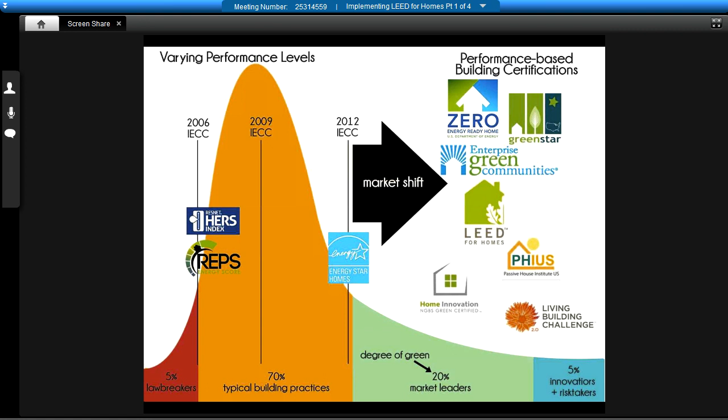Another way to look at this is in terms of typical building practices around the country. A lot of people are currently doing the 2009 IECC. Some states have adopted the 2012 IECC, which is aligning more closely with energy goals. Sorry about this background noise, folks.

Anyway, I like to think of green building as a continuum with different shades of green. It's something to keep in mind as a contextual background for where LEED fits in the scheme of things, and where other programs fit, such as the Challenge Home program, which was recently relabeled the Zero Energy Ready Home, as well as basic common denominators like the HERS index, which is used in many of these programs. HERS is specifically related to energy aspects and used to get points in the energy sections of programs like LEED, National Green Building Standard, Enterprise Green Communities, and the Challenge Home.

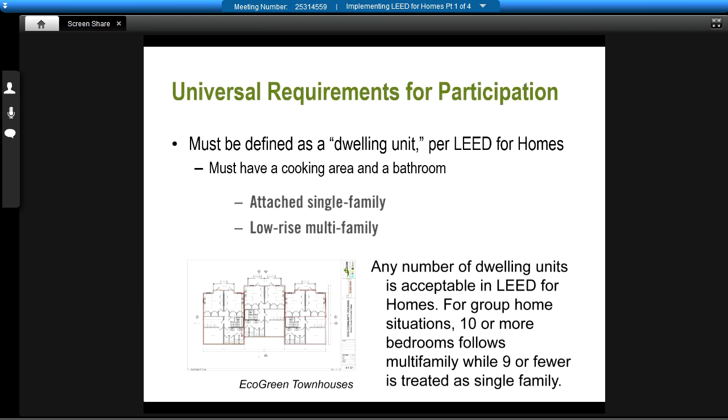I've worked on a couple buildings that are around 270 units, so that's about as big as you can get on some of these larger multifamily projects.

What's worth noting is that there are some universal requirements. Any project, as per LEED for Homes, must be defined as a dwelling unit. A dwelling unit consists of having an independent or private bathroom and a cooking area, like a food prep area. The project must also have a LEED for Homes provider and a green rater involved.

LEED is a building-level certification, so you're not going to get a certain unit in a condo building certified without the other units being certified. It really is at the building level.

In terms of the types of buildings eligible, you'll see everything from multifamily, like we talked about, up to mid-rise and mixed-use types of projects, through the program called Multifamily Mid-Rise, which we'll talk about in a minute.

We could do gut rehabs as well. That foreclosed home I showed as a case study was a gut rehab project that went through LEED, Energy Star, and NGBS, and that was eligible.

Now, had it been a project that was a more basic remodel or maybe just an addition onto a home, that's one of the areas LEED does not get involved with. So if you're thinking of a project of that nature, LEED is not going to be the right program for you to look at.

Ultimately what it comes down to is that the rater has to be able to do, just like with Energy Star, a thermal enclosure checklist inspection, which means verifying the continuity of the insulation throughout the envelope. If the rater can do that, most likely you'll be able to pursue LEED. If they can't verify the continuity of the thermal envelope, then it's probably not going to be able to go through the LEED program.

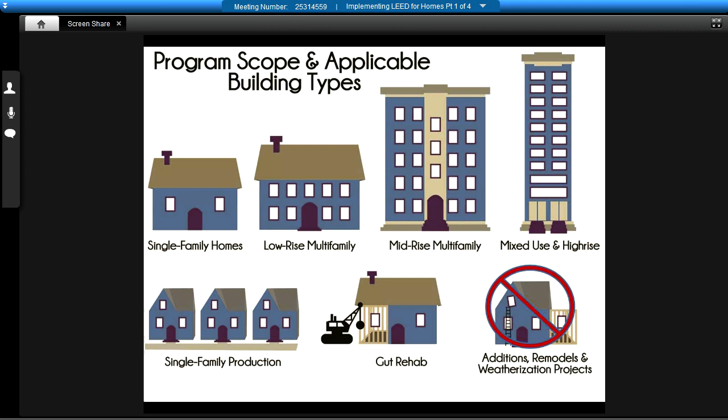But every case is a little different. So if you're in one of those situations, talk with a rater, talk with a LEED for Homes provider, and they can guide you.

Low-rise multifamily - some interesting things to know: low-rise is basically 3 stories or under, with a little bit of flexibility in the story height limit. If you have buildings or units that have their own HVAC and water heating, with no centralized system, then you may be able to go through the low-rise program even if you're a taller building.

For example, yesterday I was in a 4-story, 12-unit building north of Chicago doing final testing and verification. This project was going through LEED for Homes low-rise even though it was a 4-story building, because each unit had its own furnace as well as its own water heater. So it kind of comes down to the mechanical design and setup.

The other thing worth noting is that in these multifamily situations, typically people are doing a HERS rating or energy modeling on a unit-by-unit basis, and then the whole building is scored as the worst performing case. So if you have a lot of units at HERS 62, 63, 67, and then a middle floor interior unit might have a HERS 82 because there's not as much exterior envelope and not as much opportunity to improve the HERS rating against the baseline, the whole building is rated in LEED as if it has a HERS 82 - basically going with the least common denominator.

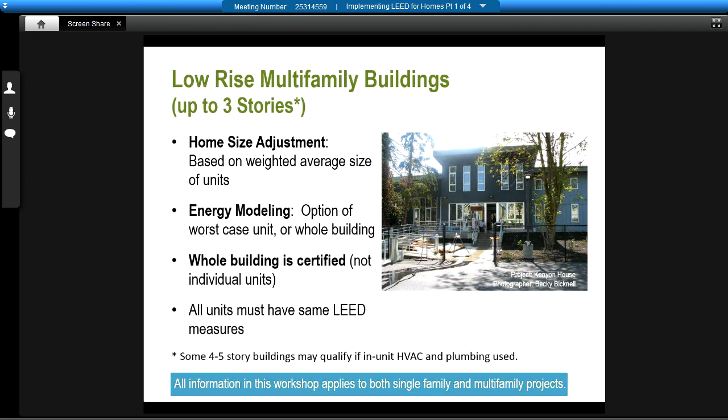As we go throughout the program, this workshop, everything we're going to be talking about is applicable to both multifamily and single family. Although certain cases may show just a single family house, all the credits are the same for low rise and single family. Actually, about 80% of the credits are the same between a single family low rise and the multifamily mid rise rating system. So much of what you're learning today is going to be applicable if you're working in any kind of residential project that's pursuing LEED.

Okay, we talked a lot. I've mentioned HERS a lot, and it's probably a good time to pause for a moment and talk about what a HERS rating is. It may be a new term for some of you. Basically, it's a national standard developed by an organization called RESNET that includes an energy design review, a thermal bypass inspection, in other words, looking at the thermal boundary or the envelope of the building and verifying that.

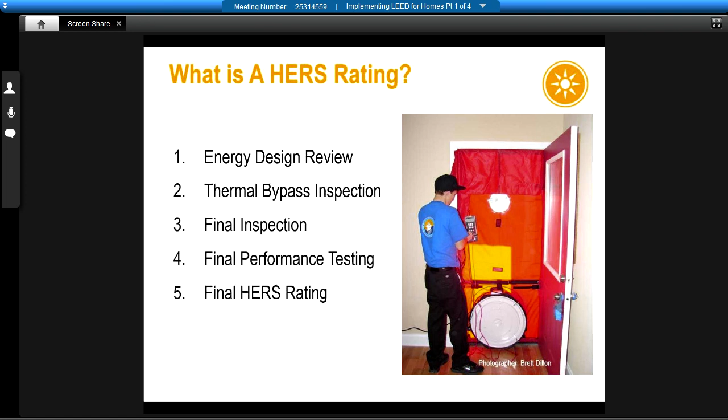Then doing a final inspection to see if everything is built as planned. At that point, doing some final performance testing, as you can see in the photo here. This HERS rater is doing a blower door test to measure the home's performance. And that all comes together into a final HERS rating.

The HERS rating is basically a number that encompasses all of the energy aspects and attributes of the building. Everything from heating and cooling, to water heating, to lighting, to appliances, to the envelope, all included in here. And what you see is that you end up getting a score of a certain amount.

The average LEED certified home is around 65. Most of the homes that I'm working with are actually probably a little bit lower than that. So it really depends on your market and the builders, and their level of performance.

But basically what this means is that if you were building to code, you would have a HERS rating of 100, a typical new construction. And if you were building zero energy, the goal that a lot of people are trying to get to, in theory, you would have a HERS score of 0.

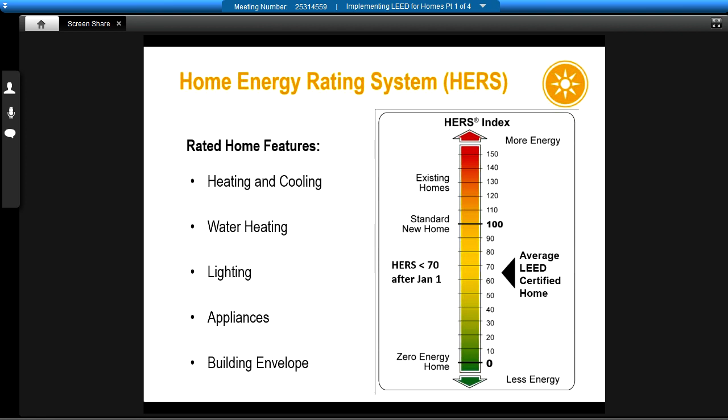So at the end of the day, it's a predictor of performance based on typical consumption, and it's basically an asset rating on the building in terms of what its energy score is going to be. And kind of like golf, the lower the better.

Everything from code. In fact, the 2015 version of the code is actually introducing an alternative pathway for HERS score to meet code. So I know in Climate 5, if you're at a HERS 54 or lower projected, you will be able to get your building permit by meeting the energy code through that way.

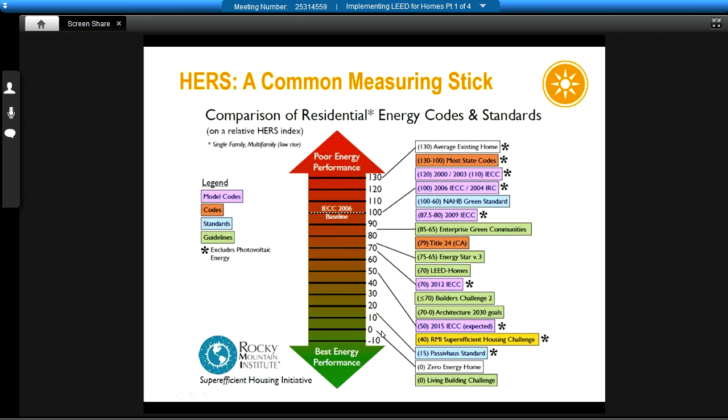And you can see all the way down to things like passive house, very aggressive types of construction, all the way down to the zero energy type homes. So anyway, it's a nice way to roadmap a lot of the programs based on their HERS rating. So just something to keep in mind, and something that we're seeing a little bit more common.

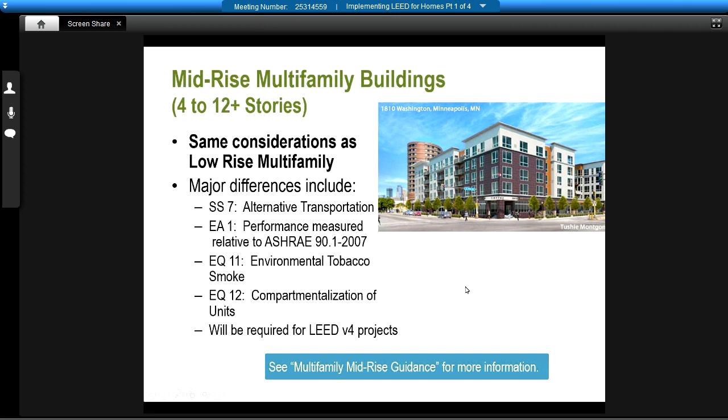Some of the differences here are that it's different from what people are used to seeing in the commercial world, some of the prerequisites, and we'll talk about the specifics on that in a couple of weeks, I think. So tune in later for more on the mid-rise projects.

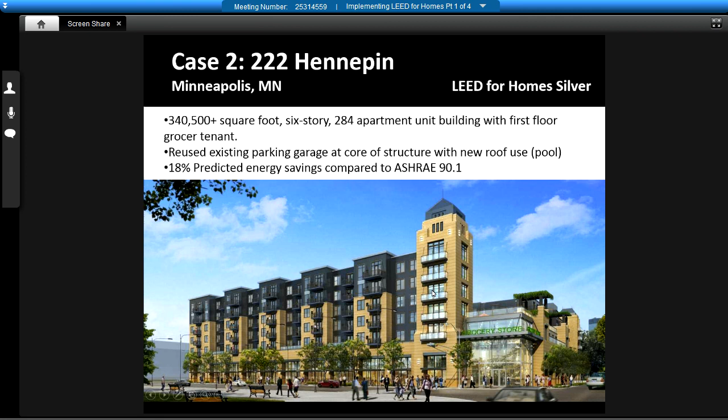But here's a quick case study. This is actually a project I worked on. I certified it. It achieved LEED for Homes Silver certification up in Minneapolis. It's a great project: 6 stories, 284 units. First floor was a Whole Foods. And they actually built this around an existing parking deck that they reused as parking for the residents.

At first, based on their energy model, they weren't actually going to achieve the required 15% above ASHRAE 90.1. So the project team decided to do some continuous exterior insulation, and that actually made a significant change and pushed them over the edge on their 90.1 energy model.

One of the things that we found in doing the testing on this building is that, for example, the microwave hoods don't really do a very good job of exhausting air. Although they're designed to meet the ASHRAE 62 exhaust requirements, in practice, once you add ductwork and everything, we found some that were meeting the standard, but some that were not. That's just an example of how the specifications and design are one thing, but how it gets installed in the field and how it actually performs is another.

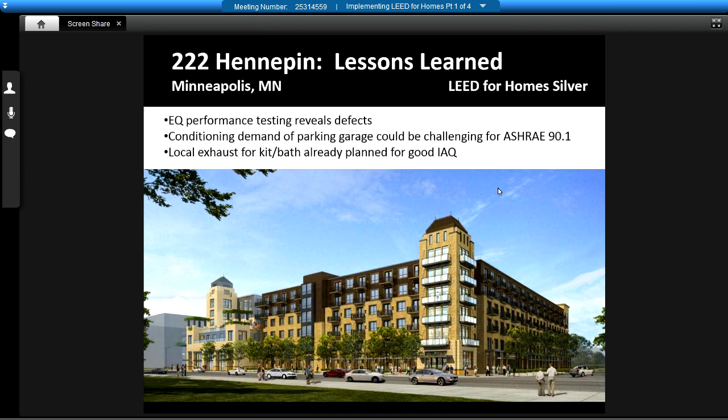We did find that the bath fans were doing exactly what they were supposed to be doing, which was good. And they had already been planning to take kitchen exhaust to the exterior, as well as bringing in fresh air, which are two of the challenges with the multifamily mid-rise program for the traditional commercial construction market. They're not used to taking kitchen exhaust to the exterior. But that is a prerequisite in LEED for Homes.

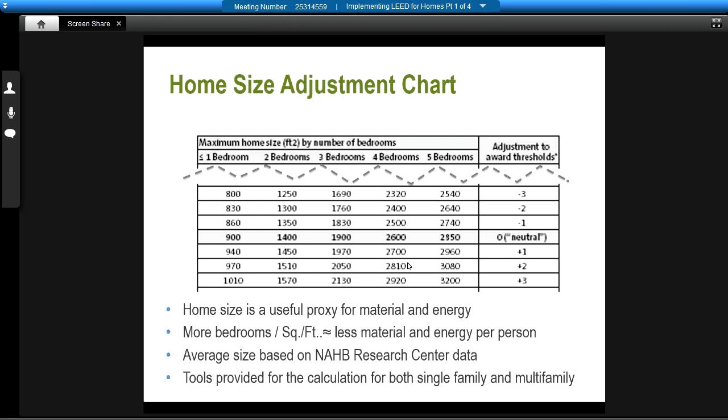And what's nice about this, you don't have to memorize the chart or anything. When you go to the checklist, on the summary tab, you enter in the number of bedrooms and the number of square feet, and the checklist automatically adjusts the point thresholds for you. So it's a built-in formula. Okay. Any questions on that home size adjuster?

Okay, I'm going to talk about the LEED for Homes team a little bit, how it gets delivered. So you have the U.S. Green Building Council putting out the standard called LEED for Homes, and then you've got a design and construction team working to build to that standard, maybe using a LEED AP Homes, although honestly that's rarely the case. There's not a whole lot out there, so I don't see many projects that have a LEED AP Homes on it.

And the other aspect is that there's a verification team. So this is a combination of the provider as well as the green rater. You can think of the provider as a quality assurance organization, and the green rater as the actual person that would come out to the home, verify measures on site in the field, do performance testing, etc. So USGBC, their role in the process is basically to create the standard and the education materials and provide teams with marketing materials and actually do the home certification process.

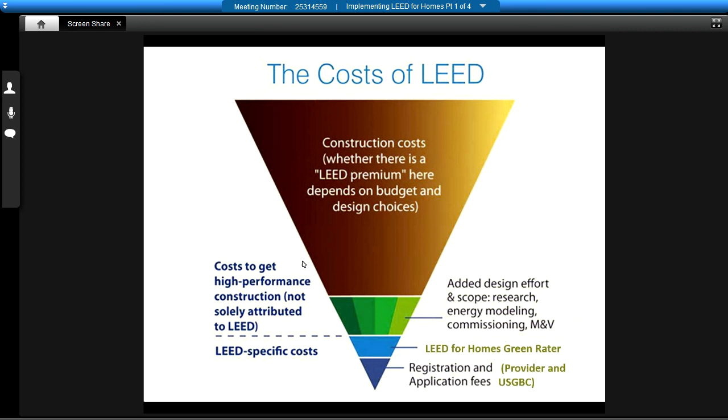There is a lot of work being done by the green rater, so it's fair to expect that that's going to be a cost that's probably going to be higher than the actual registration and certification fees that are paid for the project. And it does vary from project to project and from rater to rater. So I encourage you to seek out multiple bids and quotes. During that process, you can evaluate competency as well, because you don't want to necessarily be going with the lowest bidder if it's somebody that's not going to help your project's success.

All right, so any questions that have come up on any of this? Here we have one. Question on the home size adjuster. If the house is extremely large, what would be the maximum number of points to be adjusted? So, yeah, that's a good question, and basically there's a cap on how many points you can achieve for making it small, a max of 10, but they actually don't have a cap on the penalty side of things. So you could have a point penalty of 20 or 30 or 40 points if it was a really, really big house.

It really all depends on what's built into the calculator. So in terms of addressing that, you can't really reduce that because the square footage is what it is, most likely, as long as we're talking about conditioned space. That's really the key criteria. So what that basically means is that a project would have to earn more credits elsewhere in the rating system to help make up for the deficit caused by being a large structure.

This is the first category of the rating system we're going to go through. It really focuses on the environmental impact of materials brought into the project's building, and minimizing the amount of material that goes to landfill when taken out of the building. So it's kind of a waste-in, waste-out assessment. The ultimate goal is to reduce the quantity of waste produced through the construction process by improving the building, using responsible procurement, and implementing certain framing measures that help support these goals.

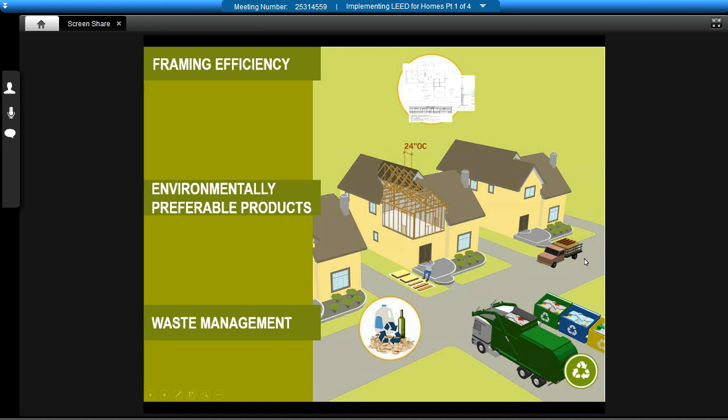The way this comes together in LEED for Homes is basically looking through these credits. What's nice is these concepts are organized around the efficiencies in which the building is framed—the framing efficiencies, as you can see here. What do we mean by framing efficiency? Basically, we get prescriptive lists of items that can be done to make a building efficient, and we're going to go through those in more detail. This is just an overview slide at this point.

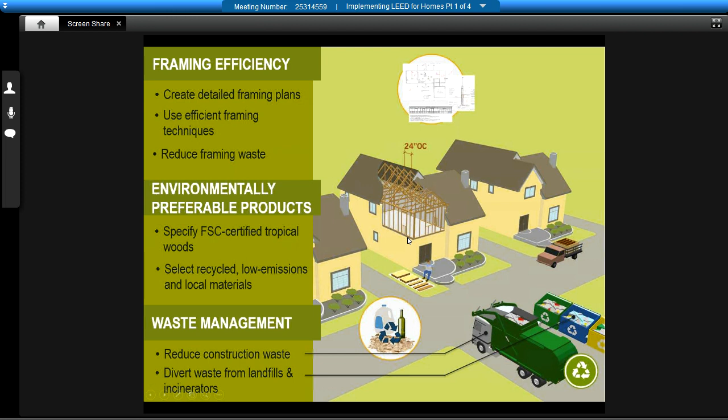Doing things like advanced framing helps minimize the amount of lumber used in a building. The second area is choosing and specifying environmentally preferable products—this could be FSC certified tropical lumber, items with recycled content or low emission characteristics that improve air quality for occupants, and also using locally sourced materials.

And finally, there's a credit involved with looking at how we can reduce construction waste in the process of building this green home, and divert waste from landfills and from incinerators too.

So those three items are basically turned into three credits in LEED: one credit for material efficient framing, one credit for environmentally preferable products, and one credit for waste management. This is an area where we do need a minimum number of points—in this case, a minimum of 2 points—which is pretty achievable for all projects I've ever run into. These credits are overarching categories that have many sub-credits beneath them.

Credit 1 is actually broken out into 5 different types of items, and these first 5 lines all relate to framing and how buildings are framed, which is our traditional construction material on residential projects—wood framing. There's a combination of prerequisites here as well as items that are eligible to earn points.

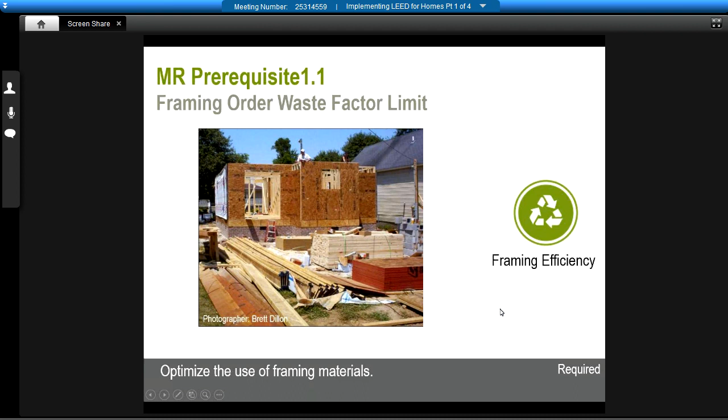We're looking at making sure the right amount of wood comes onto the job site, because if too much wood shows up, a lot of it ends up either going into waste or being unnecessarily used in the house framing—like, 'oh, we had this extra stud, so we'll just add it here next to the window to make it stronger.' Well, that's a waste of material, and it also makes for a more energy inefficient structure.

So the requirements for this prerequisite are to limit the overall waste factor to 10% or less. The waste factor is defined as the percentage of framing material that's ordered in excess of what's estimated.

So if you're estimated to need 50 2x8s for a project, there's a waste factor built in—the lumber yard might send 57, for example. Now you're over 10% waste because you've got 7 extra 2x8s, and a 10% limit would mean you couldn't have more than 5 extra 2x8s if you had 50 ordered or 50 estimated.

Construction teams will usually get a few extra pieces of lumber because some might be twisted or warped. But the prerequisite here is that you can't have more than 10% waste on the order.

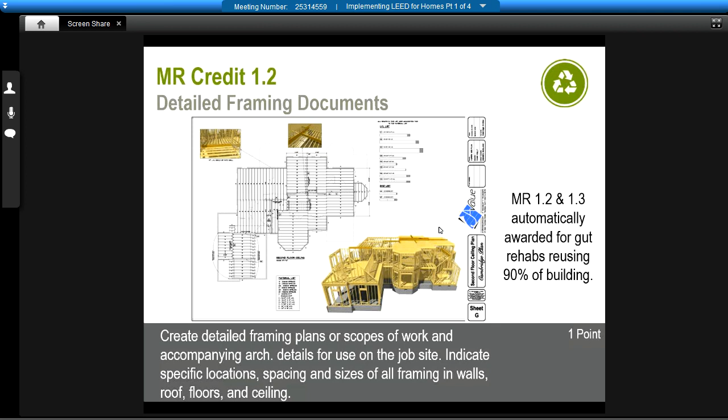There's a related note that we're not going to cover much - wait, I do have a slide for it, actually. Anyway, there's a related note that to accompany the detailed framing plans, you can have a detailed cut list and lumber order. That's worth another point.

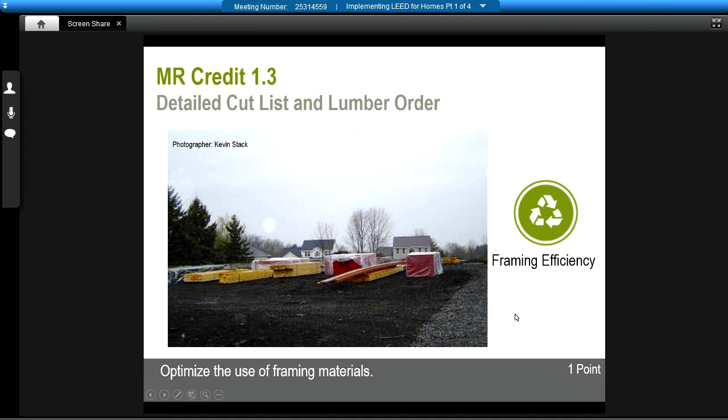It's worth noting that if you're doing a gut rehab project like that foreclosed home I showed, you can automatically earn MR 1.2 and 1.3 credits if you're reusing 90% of a building. So if it's a gut job without a major addition, and you're keeping the framing and gutting down to the studs and reusing that, there's a couple extra points you can get for reusing the building.

So here's the other half of that credit. This credit for the detailed lumber order is actually something you can't achieve unless you first did the detailed framing documents, right? You have to have the plan before you implement it in terms of buying the wood. And that's what's emphasized in gray here.

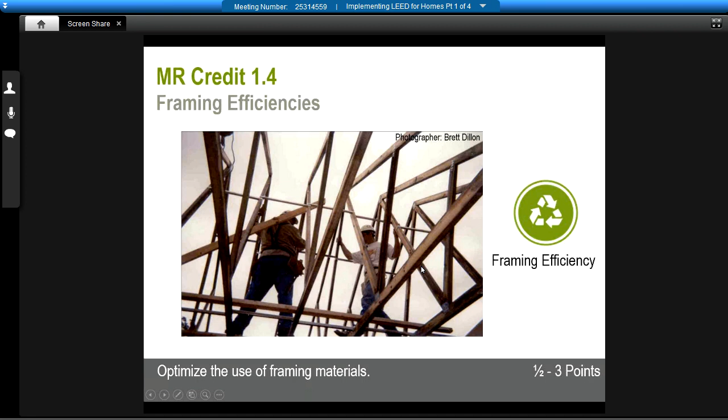The next part of this credit is framing efficiencies. This is basically a prescriptive checklist of whether the criteria gets met for any of these measures for 90% of the structure. The idea is that conventional framing uses up to 20% more material than is actually needed for the structure, and that's a lot of extra wood.

The reason this credit really focuses around wood framing is because that's what 90% of the housing stock is built from in this country. So the idea is to reward this, to get people thinking about some of these measures earlier on. Doing things like trusses, spaced 24 on center, which is what this photo is showing, is something that's rewarded.

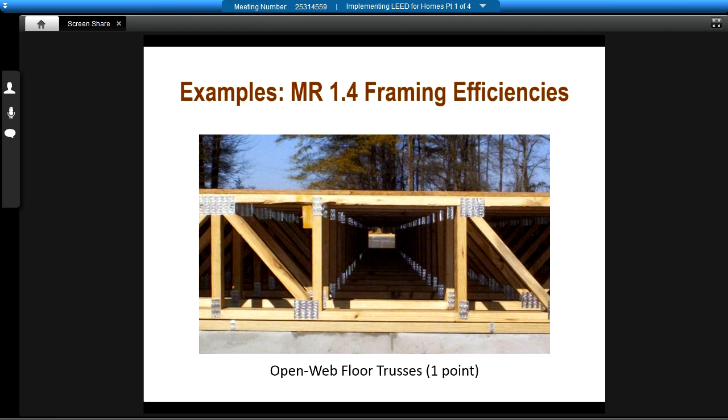Doing open web floor trusses is rewarded because it uses less material, and you can get wider spans out of it too. One of the cool things about open web floor trusses is that, as you can see here, that's a nice space if you've got to run a trunk line for an HVAC system or any major plumbing lines. You can do that and still not interrupt the clear span, or have to build a soffit or anything of that nature. So there's kind of a dual benefit there.

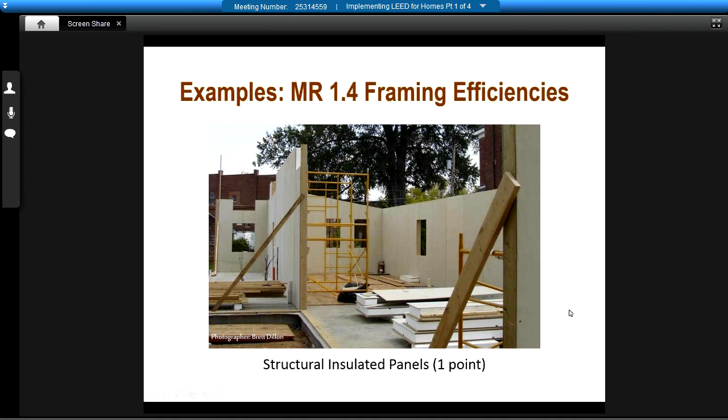Other examples of framing efficiencies are structural insulated panels, or SIPs. You may have heard of them, either for the floors or the roof. In this case, you see them being built for the walls - it looks like they might have the roofs ready to go on the ground there. Basically, these get put together in at least 4-foot intervals with one kind of framing member in between them, so it's a very efficient envelope with basically a 4-foot on-center stud that helps hold them all together. When it's assembled, it creates a pretty strong envelope.

One of the key things to note is that it's actually got OSB on both sides typically of a sheet of spray foam. Basically, it's foamed in place in between, so you get a really nice insulating value from these as well as being material efficient.

Other framing efficiencies are doing stud spacing more than 16 on center. So 16 is common, but doing things like 7 studs in an 8-foot span instead of 8, such as 19.2 on center, or more commonly 24 on center stud spacing, are rewarded here. It's worth noting that 24 on center stud spacing is actually now required for Energy Star homes as well.

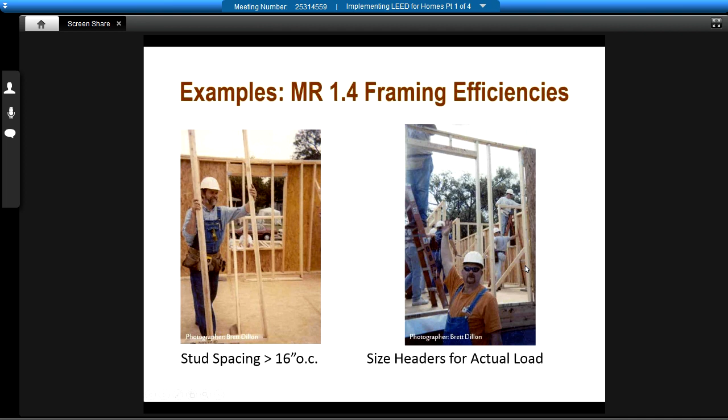Some of the other measures: sizing headers for loads. You don't need large headers above windows if the load is being carried on another roof. If it's a gable-style roof and you're on the end gable, you don't need a large header there because the roof load is being transferred to the side gable walls. So having minimal header openings is rewarded instead of using a bunch of extra material. Obviously it takes some coordination with the framers on site to understand which headers are meant to be structural and which ones are not.

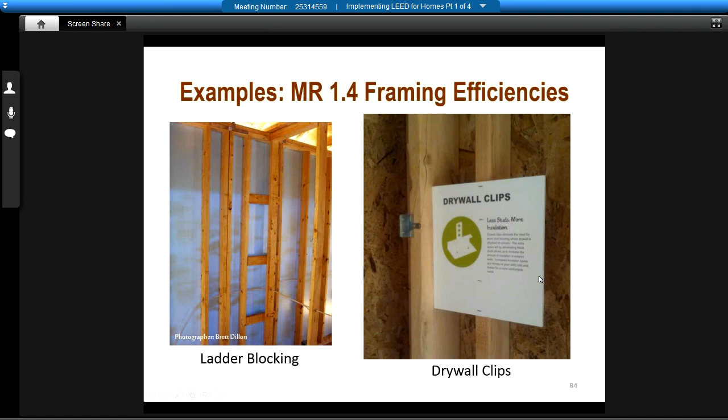Other examples of measures being done: ladder blocking. What that means is that where an interior wall joins an exterior wall, instead of using a full-length stud to nail that up against, they use basically cut-off pieces that are probably scrap or waste lumber from something else, placing those across 2 studs and nailing the adjacent wall into it.

So that's rewarded. Drywall clips are another thing that's rewarded to help eliminate an extra stud in the wall. You can see this is actually a photo from that home tour that I helped coordinate.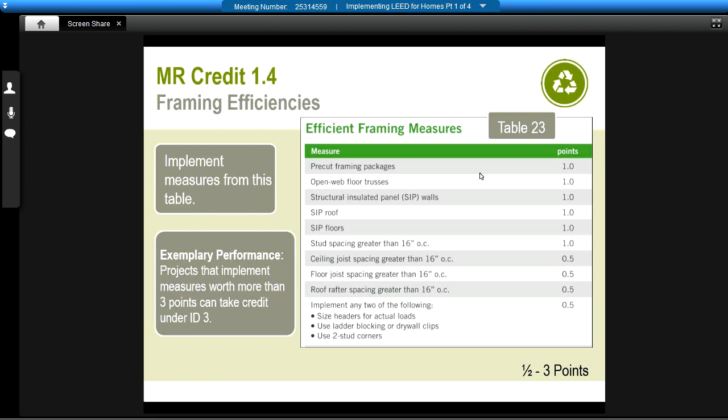Just to recap some of these framing efficiencies, they all earn different levels of points in the rating system. The ones that have a bigger impact earn more points. Again, these are all optional things to get because they're points, not prerequisites. The cool thing is that if you do a lot of these things, you can actually take extra credit for them as innovation credit for exemplary performance, which we'll talk about later in the fourth week. Basically, there are options to get more points if you do a lot of these measures.

The final framing-related credit is credit 1.5, and this is basically for doing off-site fabrication. This was actually a pretty cool project in Chicago, recently highlighted on Dwell's website about a month ago. It's a prefab house, a LEED Platinum home that was built at a plant, and then, as you can see, on a narrow lot, they had to crane it into place. There were, I think, about 4 modules in this structure that came together.

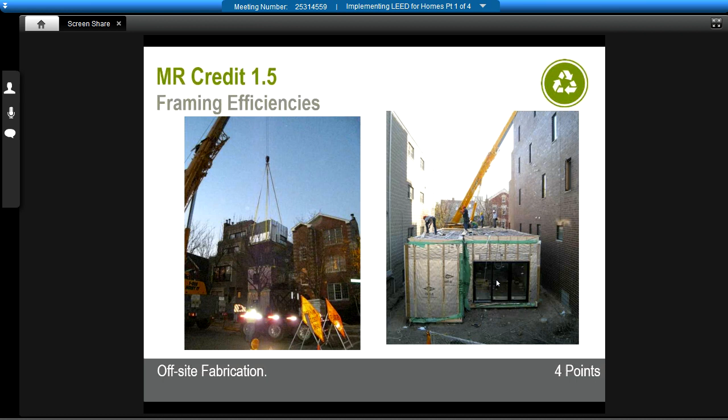If you have off-site fabrication or even panelization done off-site for all the roof, walls and flooring, then you can claim 4 points for that. It's a pretty big credit, and that just makes the site much more inherently efficient. The plants, the operations at these manufacturing plants and panelization plants, are inherently motivated to be efficient, so there's very little waste that actually ends up being generated at these plants. It's a much more waste-efficient type of construction.

Okay, on to credit 2. The first aspect of credit 2 is a prerequisite that says you have to have FSC certified wood if it's tropical. This does not mean that every framing member, stud and joist in your home needs to be FSC certified. What this is saying is that if you use any tropical lumber, then that tropical lumber has to be FSC certified. This is a big thing to note. So what might be some tropical lumbers that are used on homes? Some examples are mahogany doors.

I've seen a lot of ipe used; it's a tropical lumber that's used as a rain screen. Brazilian cherry flooring, for example. And even in some cabinets, or sometimes as an underlayment, you'll find wood that's Luan, and Luan is commonly a tropical lumber. So if your project or any of your suppliers are using that type of lumber, then it needs to be FSC certified.

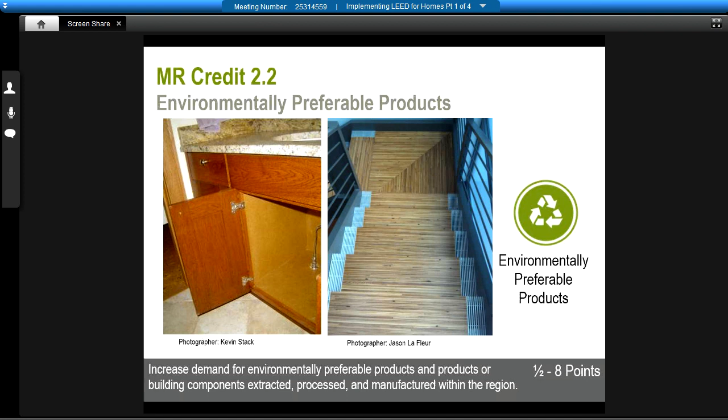For example, there's a guidance document for commercial spaces in a multifamily building, a guidance document for doing a gut rehab project and what specific things might need to be done differently, and a guidance document for non-wood frame structures that talks about how to recognize and reward those types of structures, and how you would claim points for those. So check the Excel document for the checklist, which we'll send you a link to after class.

MR Credit 2.2 is the second part of this materials credit. The first part was FSC tropical lumber. The second part is rewarding environmental attributes of things. So this could be, for example, on the photo on the left, you might have recycled content countertops and cabinets made of recycled content like MDF with no added urea formaldehyde. Each of those would earn a half point each for the project under this EPP credit.

The photo on the right was actually a really interesting gut rehab job. For those familiar with how buildings were built before World War II, instead of drywall, they commonly used plaster and lath, little pieces of 1-inch wood nailed up between the studs, with a coating of plaster, actually 3 coats, smeared on to give you the finished walls. In this gut rehab project, they deconstructed everything, saved every piece of lath, and the builder took those pieces, planed them all down, glued them together, sanded and planed them. What you're seeing is the end grain of the lath put together as stair treads and risers for a stairwell.

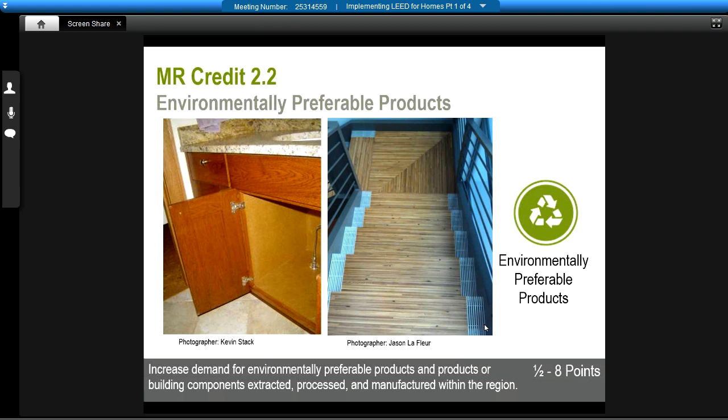Pretty remarkable effort to keep waste out of the landfill. And great looking design too. Just an incredible amount of effort that went into that.

I'm showing it here because this is something that could be considered both recycled content, since it came from the previous structure, and also something where salvaged pieces of equipment or salvaged components in the home earn credit for being salvaged and recycled. You'll also earn a half point for it being locally produced, because it came from on site.

This next slide might help make it a little bit clearer. You basically have 3 buckets on which any product, any major component, can be graded. The way this is done is much different than other versions of LEED. If you've worked in other versions of LEED, forget everything you know about those versions, because this is not overall percentage based on cost or anything like that. This is straight, on a component-by-component basis.

For the cabinets, like we saw on the previous slide, what percent of the cabinets meet one of these attributes? If 90% of the cabinets meet an attribute, you can check the box and earn a half point. If 90% of the wall framing is reclaimed, because you're doing an existing building as a gut rehab without a major addition, then you can earn points for that as well, being reclaimed exterior framing, reclaimed roofing. There's like 20 different items or components you can earn credit for in one of these 3 categories: environmentally preferable, low emitting, or locally produced.

Another item to look out for is locally produced materials. I'm in Chicago - Pella windows are made in Iowa, within 500 miles of a Chicago project. However, if you're getting their vinyl window line, the vinyl is made from oil, which more than likely isn't from within 500 miles of the project site. So you have to look at the key words extracted and processed, not just manufactured and assembled within 500 miles.

And if you're doing a gut rehab type situation, and 90% of a component is unchanged or still in place, you can earn credit for it being both locally produced and environmentally preferable because it's salvaged.

Let me put this in more defined terms. Let's say we have a project using denim insulation, made from cotton - a renewable resource - for 96% of the project. They're using bamboo for 92% of the flooring, FSC certified plywood throughout for all the sheathing, Green Seal certified low-emitting paints, and recycled aggregate for all the foundation work, basement walls, patio flatwork, and driveway. How many points would this earn?

What it comes out to is you basically have 6.5 total points for 11 items. You get a half credit for recycled content, because it's pre-consumer denim. You get credit for flooring - it's such a big component they actually allow you to double up on flooring in terms of points, so you get 1 point for the bamboo flooring, basically 2 half points.

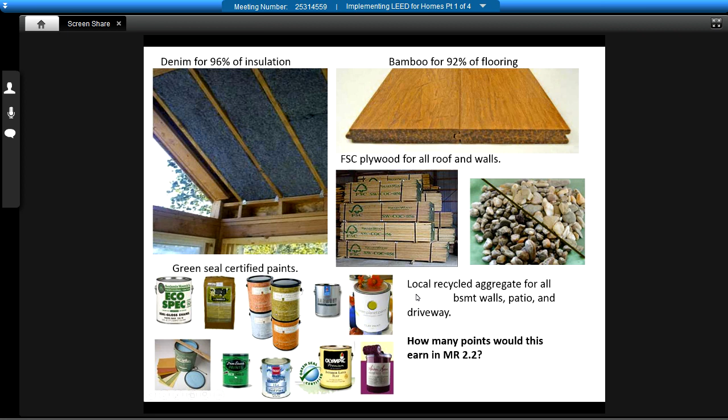There's also a low emitting credit - if 90% of your flooring is hard flooring, you get a low emissions credit, since hard flooring doesn't trap dust and allergens like carpet does. Then you have FSC sheathing for 2 components, roof and wall, so that's a full point. The recycled content aggregate would actually be 3 points - one for the patio, one for the driveway, one for the foundation walls - and a half point for low emitting paints.

You really have to spend some time with the MR 2.2 section and credits. We could probably do a full hour just on that section if we really had the time.

I just want to caution you - when you're looking at manufacturer spec sheets, be careful. You'll see things like this all the time that say MRC 4. There is no credit 4 in LEED for Homes, and there's no credit 5 either. What they're showing you is LEED new construction, LEED new commercial interiors, and LEED existing buildings compliance. If you look through all these specifications to see what applies for LEED for Homes, there's only one item here that would count - the 50% post-industrial recycled content for the Neo floor tile.

So a word of caution when looking at spec sheets: make sure there's a column or sheet specific to LEED for Homes if you're going to be relying on that in your specifications.

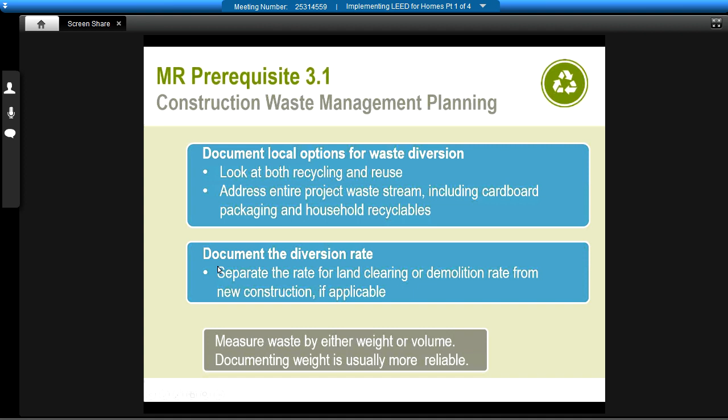Okay, finally, the last credit - pretty easy and straightforward. The prerequisite is that you have to create a plan for construction waste management. How is waste going to be handled? Are you going to sort on site, or have a single dumpster taken off site where maybe the waste hauler can do sorting, which is commonly what I see in my market? Are there places that might take some of the waste, such as a warehouse for building material overstock called the Rebuilding Exchange that some people in my market use? So maybe there's some kind of plan for how waste might be diverted. That's the prerequisite.

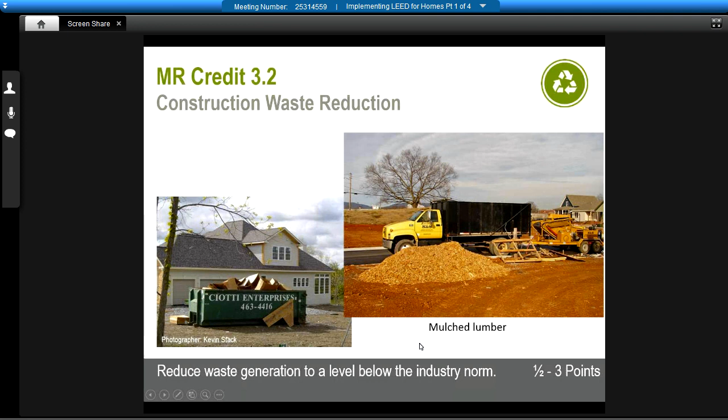Then when you start to implement that plan, you earn points for reducing waste beyond normal levels. More specifically, the prerequisite is that you investigate local options and try to document the diversion rate, separate from land clearing and demolition - so it's really once construction starts.

And as you create less, you reduce further, then you can earn more credit. And I've seen people do things like in the photo here, you can mulch lumber, turn it into mulch. I have one project that took the shipping pallets and turned that into mulch. Making sure cardboard's recycled. You could have separate bins for some of the stuff, or just do it off-site and have the hauler take it away.

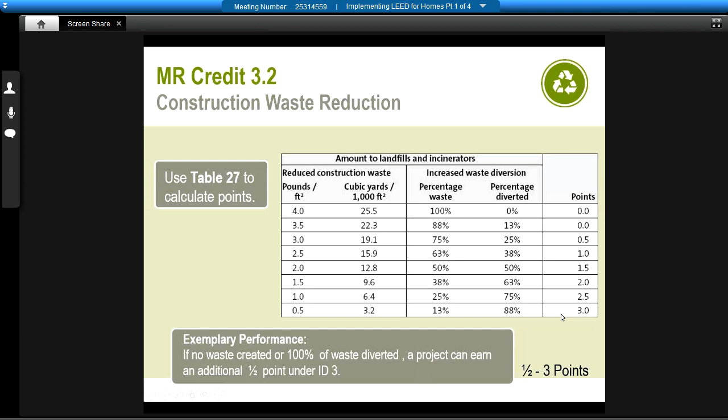However you can document it is up to you in order to prove these points, as long as you're meeting the thresholds of the rating system. So these numbers are kind of meaningless, so I'm going to skip this slide and go to the table that kind of shows, the more that's diverted, the more points you're going to accrue. Most projects I see are typically using this fourth column, percentage diverted, as the way that they're getting reports from their waste haulers to earn the points.

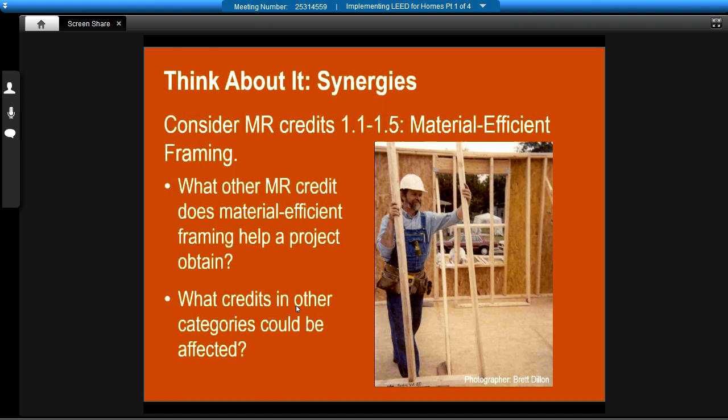Although sometimes, I had one panelized project that actually just certified at LEED Platinum last week. It was panelized and built off-site mostly, so the on-site waste was pretty small, and it was more advantageous to go through the weight per square foot of the conditioned space rather than the overall percentage diverted. They got like an extra half point or something. So that's flexible and up to however you want to submit it for certification at the very end. If you're tracking it all these ways, you can choose the one that's most favorable.

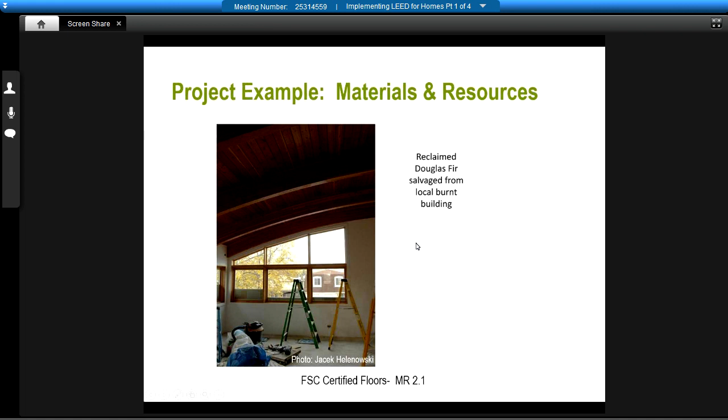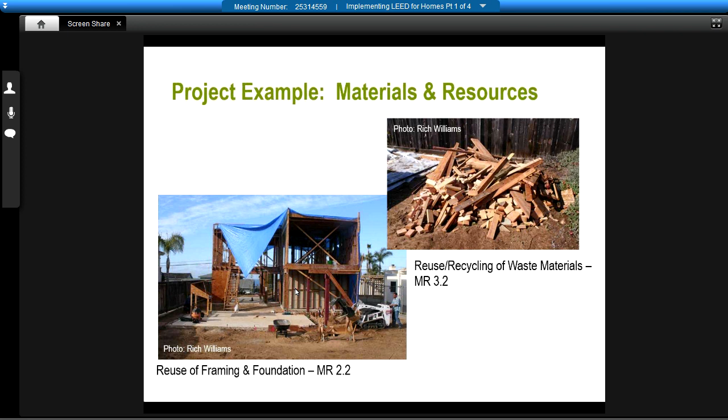And just a little thought about some of the synergies here. When you talk about material efficiency, a lot of times you can see how these framing efficiencies will end up creating a more energy efficient structure, right? So it's going to help with your energy performance and HERS rating if you're doing stud spacing at a wider interval than your standard 16-inch on center.

So here's just some project examples. Here's a project that used reclaimed salvaged lumber from a burnt building that was turned into their ceiling, recycled content drywall on all the walls. This is probably the extreme example of a gut rehab. It looks like they saved like one interior room on this project. This is in California somewhere. And they really gutted the whole rest of the house on the exterior and rebuilt the whole entire thing.

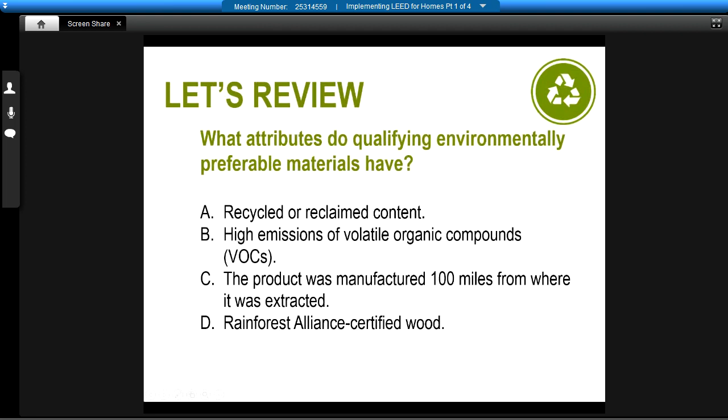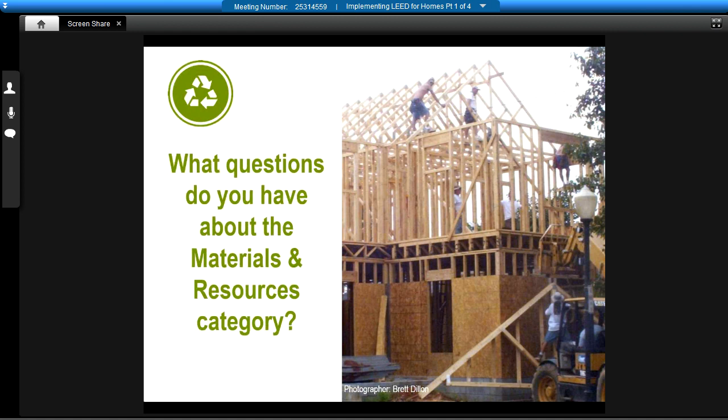Just a quick little review question for you. What attributes do qualifying environmentally preferable materials have? This is a good example of something you might see on the LEED AP Homes exam. You'll see various things, like there's not really a Rainforest Alliance certified lumber. They certify other things. The distance that we're looking at for local points is 500 miles, not 100. We're looking for low emissions of VOCs, not high emissions. So A would be the correct answer here.